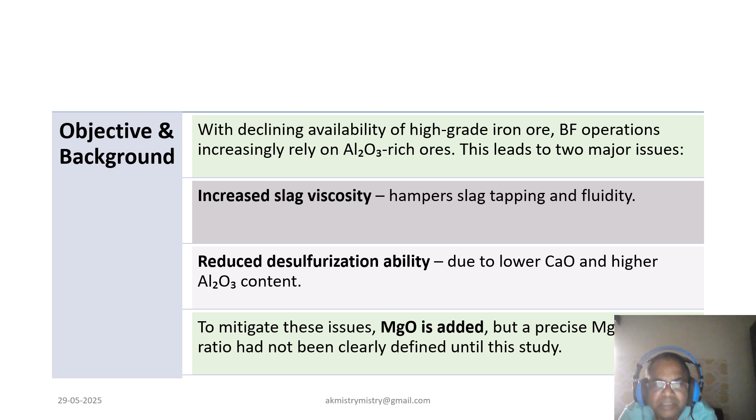With the decline in availability of high grade iron ore, the topic is very important now, how to rely on high alumina rich ore. As we know, alumina rich ore contributes to high alumina viscous slag, and once slag viscosity increases, the operational efficiency of blast furnace decreases.

In order to take care of such a burning topic, the MgO by alumina ratio is being studied through a phase diagram, the viscosity measurement at lab scale, and few industrial data sharing is being done in subsequent slides to catch hold of the MgO by alumina issue.

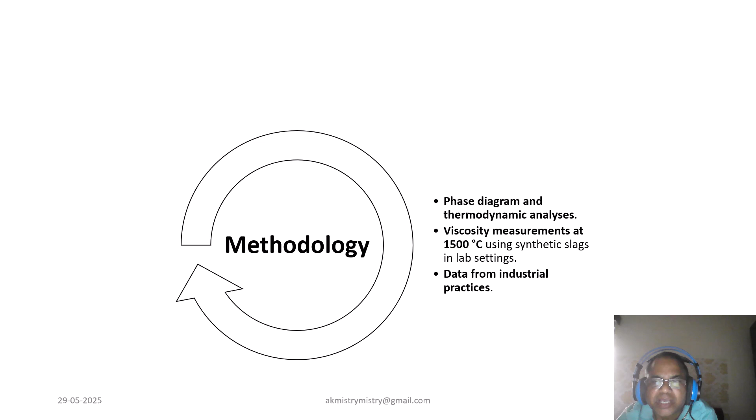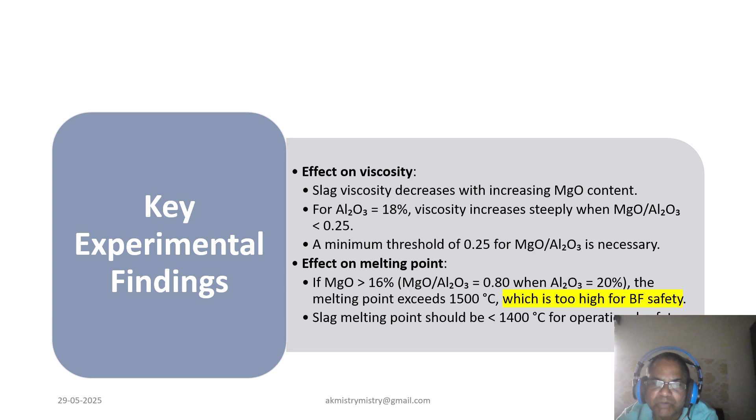As we know, the viscosity of high alumina slag in blast furnaces could be well taken care of by addition of MgO. But addition of MgO is to be a very precise decision making activity. If we increase the optimum amount of MgO, then only the decrease in viscosity of blast furnace slag can be done effectively. If we increase MgO content beyond a limit, then our melting point also shoots up very high, where the inefficiencies of blast furnace start occurring.

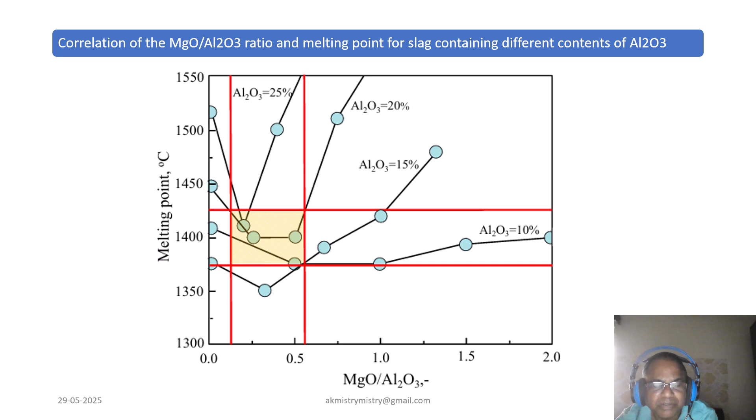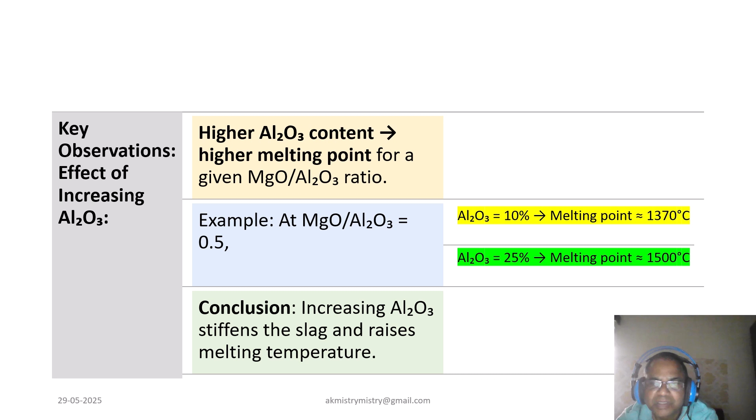As this graph clearly shows, our center of operation is the yellow rectangle. This shows very clearly how the melting point of slag shoots up when alumina increases from 10% to 25%.

As we can see from the graphical trend narrated in this slide, in the yellow region MgO by alumina keeps within 0.4 to 0.6, and by doing this, melting temperature is well within the feasible range, that is around less than 1400. So we can say that based on that graphical trend, our feasible operation of blast furnace is in the 0.4 to 0.55 region.

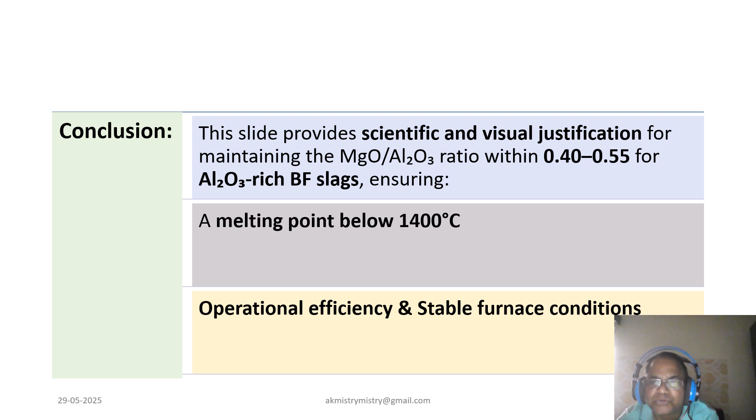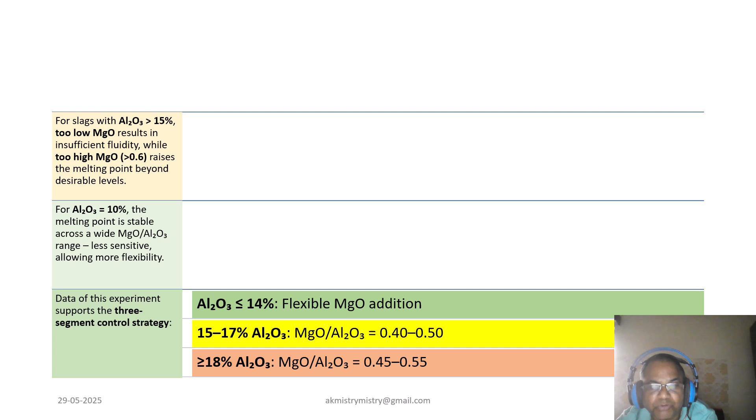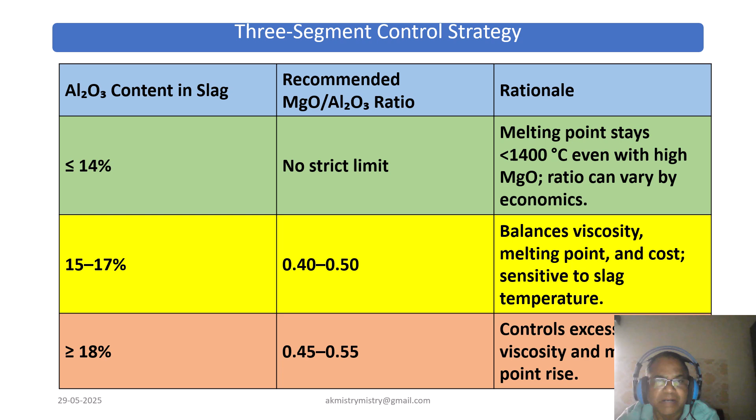Here, on the basis of the alumina scale, a three segment control strategy is being discussed. The first segment of alumina is less than or equal to 14%. The second band is in between 15 to 17% for MgO by alumina 0.4 to 0.5, and when alumina goes beyond or equal to 18, MgO by alumina remains at 0.45 to 0.55 level. The same thing is reproduced in this slide, and it is named the three segment control strategy.

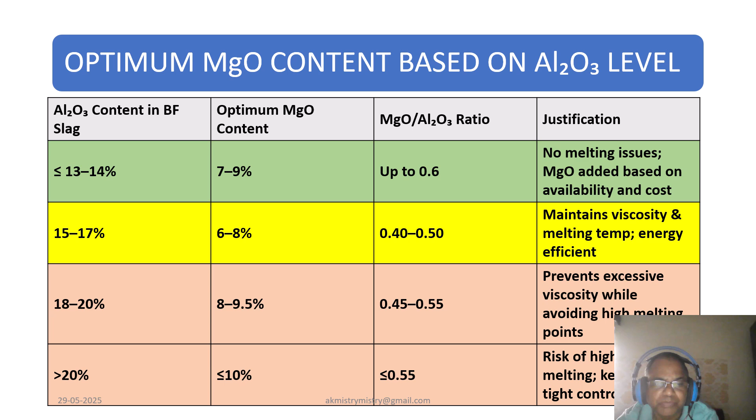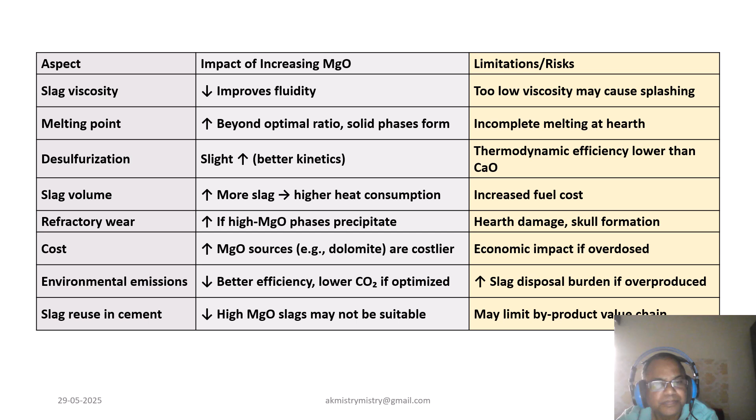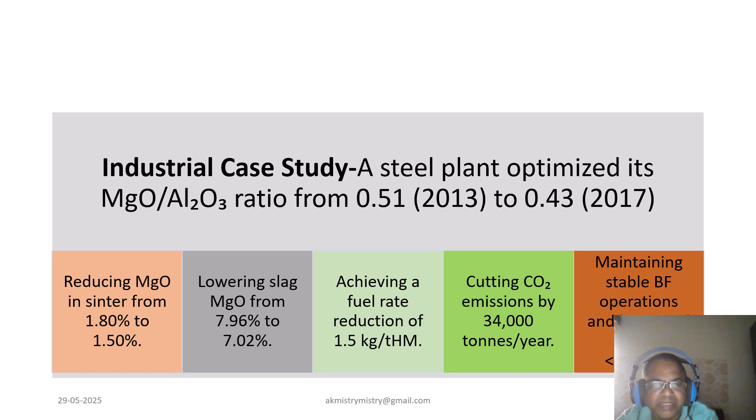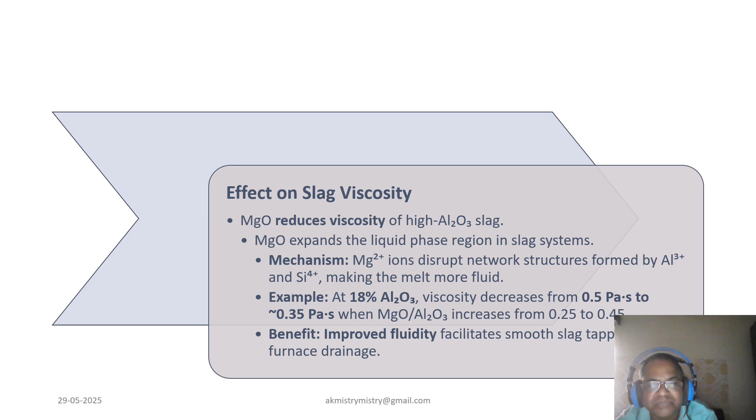Now coming to a bit of knowledge sharing on how MgO works in diluting the viscosity of alumina slag. As shown, the mechanism is that Mg2+ ion disrupts the network structure formed by Al3+ and Si4+ ions. For example, we can say that at 18% alumina, viscosity decreases from 0.5 Pascal second to 0.35 Pascal second when MgO by alumina increases from 0.25 to 0.45. So this is a tremendous benefit for a blast furnace when this fluidity or viscosity part of the slag is taken care of, and this improves our tapping efficiencies, furnace drainage, wind acceptance, and so many things.

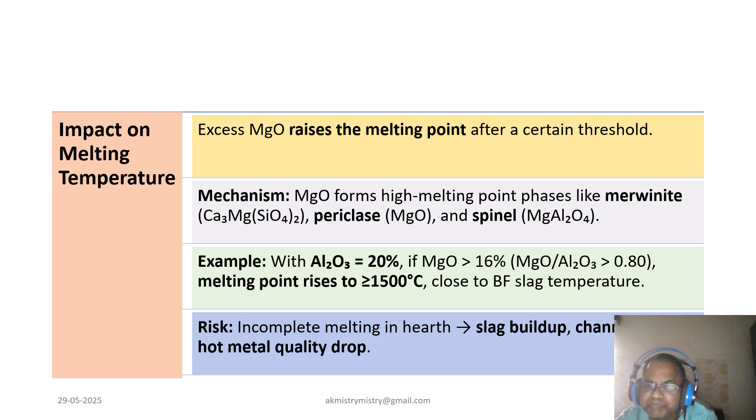Now coming to the MgO rise and melting point temperature increase mechanism. This mechanism basically happens due to formation of merwinite, periclase, and spinel. These are very high melting phases, and when MgO is added beyond a certain limit, formation of these phases is provoked. For example, when alumina is 20% and MgO is more than 16%, our MgO by alumina ratio goes beyond 0.8. At that time our melting temperature goes beyond 1500 degrees centigrade, which is impractical for blast furnaces, and in such cases there is always a chance of incomplete melting of the hearth, slag buildup, and so many irregularities will occur in the blast furnace.

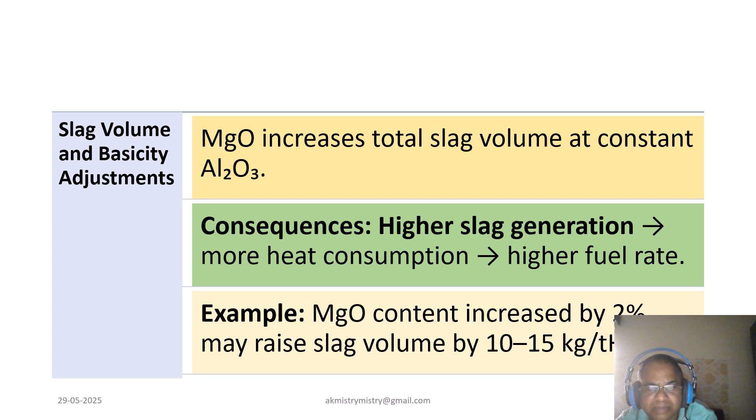So MgO increases the total slag volume at a constant alumina, so higher slag generation will lead to higher fuel rate. One example has been taken when MgO content increases by 2% and our slag volume goes beyond 10 to 15 kg per tonne of hot metal, which leads to a high increase in fuel rate.

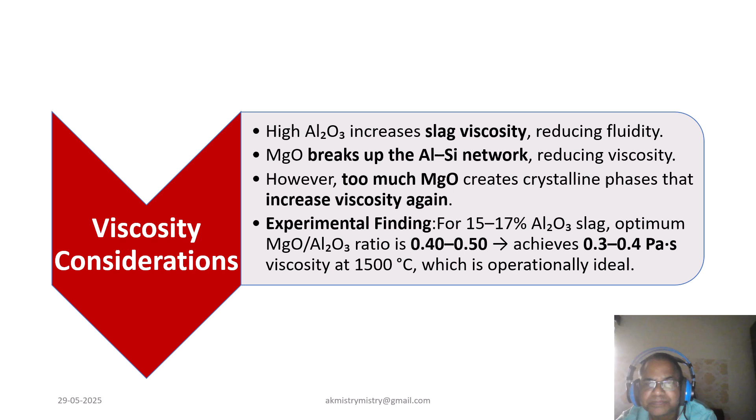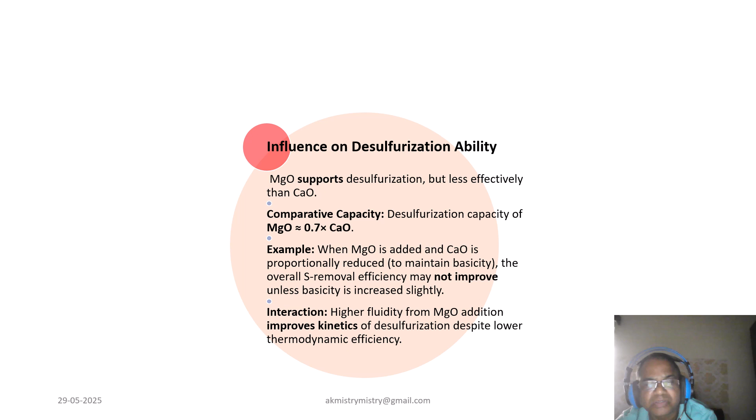Similarly, our desulfurization ability is also to be looked into, because as we increase this MgO, we must keep basicity around constant, so CaO will decrease. We know that desulfurization capacity of MgO is almost 0.7 times that of CaO. So we can say that when MgO is added and CaO is proportionally reduced, the overall sulfur removal efficiency may not improve unless basicity increases slightly. So we can say this operational cost implication is also there when you have more MgO addition.

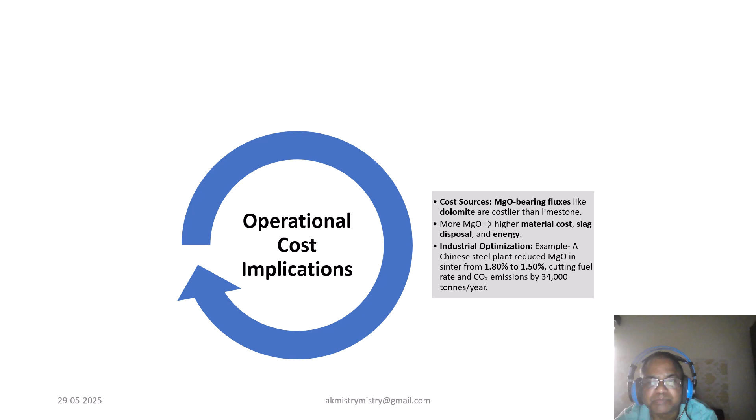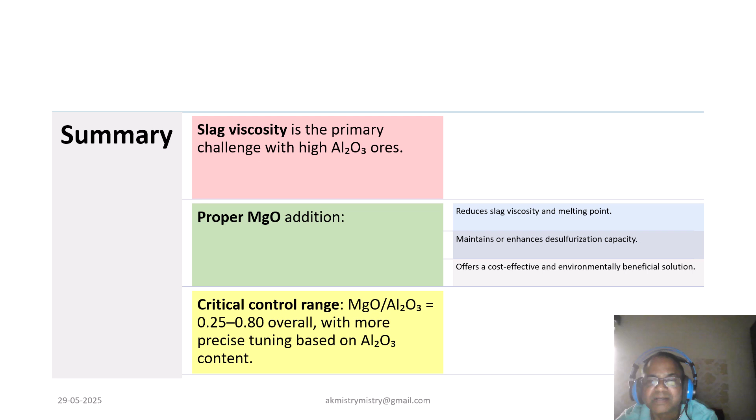Thus, MgO addition becomes a very important aspect to look into. So we can say that proper MgO addition is a very skillful decision, and of course this slide's data, statistics and findings help operators in deciding at what band they should operate their slags. Thank you.